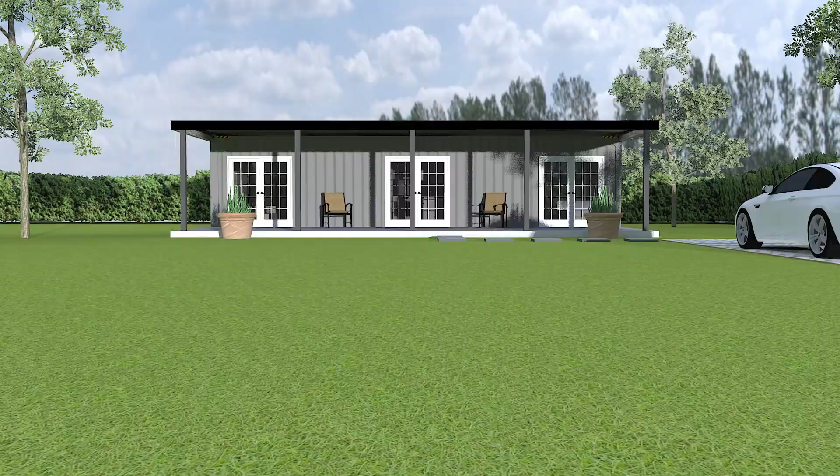The full tour of this container home will continue at the end of this video, but first, let's see how this model was made.

Okay guys, so today's 3D model is for a client who hired me. He had a shipping container home idea, very simple one, single container with a little patio deck out front. There it is right there. Let's go ahead and dive in and see how I brought this 3D model to life for my client.

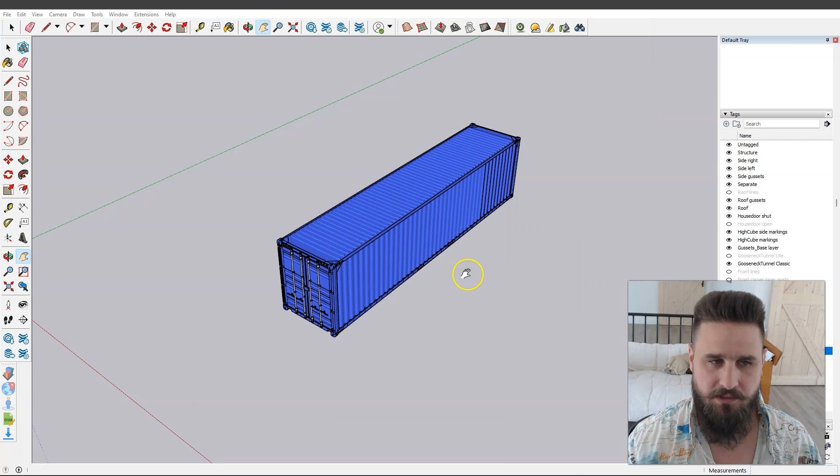The client provided me a few YouTube video examples of the shipping container. Essentially, it's a single 40-foot high cube container. First things first, let's go ahead and make the roof invisible.

Probably the most important detail that he told me was he wants a small room on either end of the 40-foot container. So let's go ahead and put some walls in here to represent sort of this small room. You don't want to make a room too small.

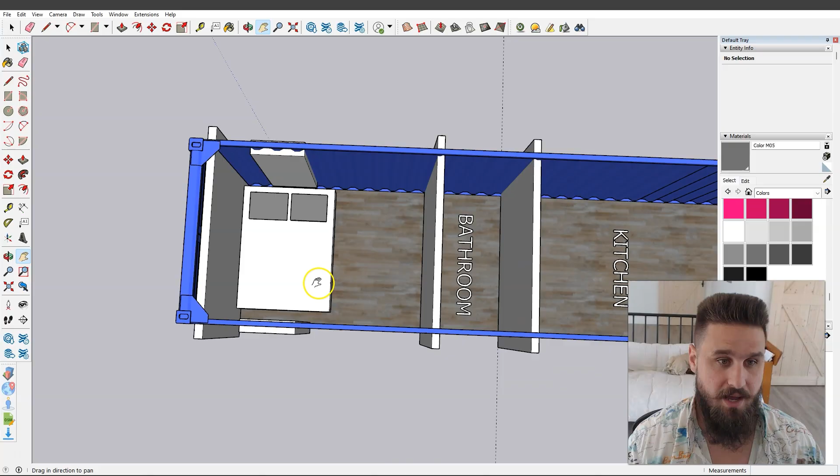So I think that for now, this is going to suffice. I'm going to send this over to the client, get his feedback, and then we will go from there.

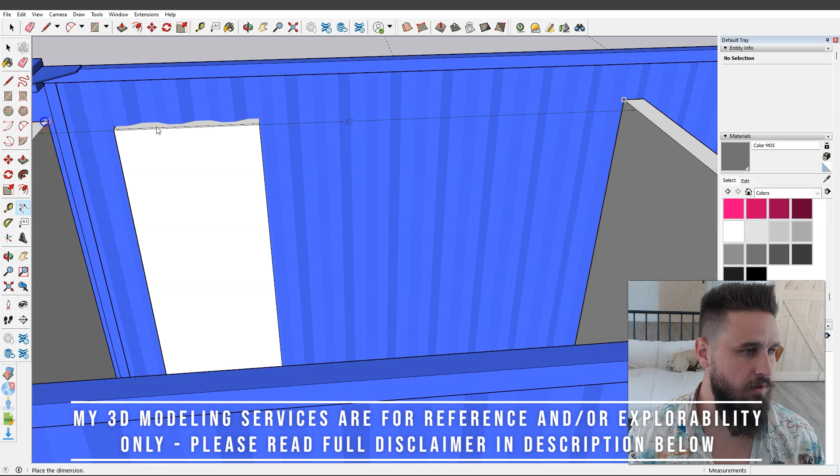Oh, I forgot to do one last thing. I'm going to add some sort of dimensional marks showing the dimensions of the rooms. It's going to be very important for the client so that he can get a sense of the current dimensions and what we're working with.

And we're back. I was able to get feedback from the client, and he's specified some of the details. So here is the drawing that he sent me. Again, basic, but this is actually, you'd be surprised how helpful these are. Hand drawn on a napkin if you want, it's perfectly fine.

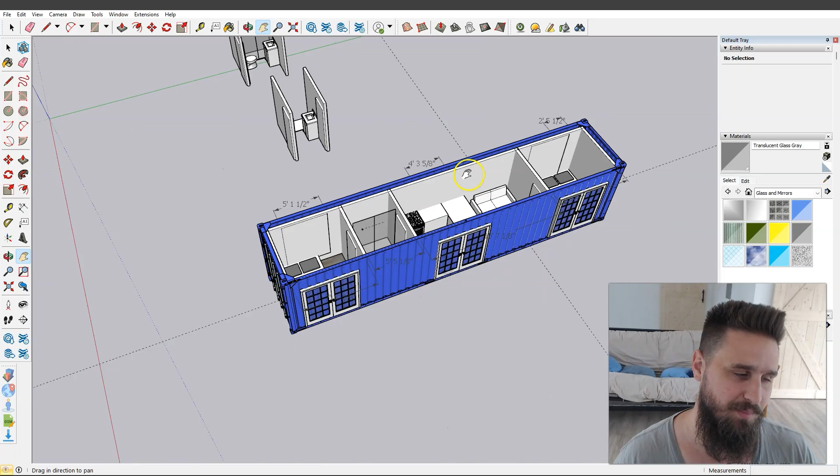Alright, we are back, and the client has taken a look at the model and he is quite confident in the current floor plan setup, which means it is now time to start framing.

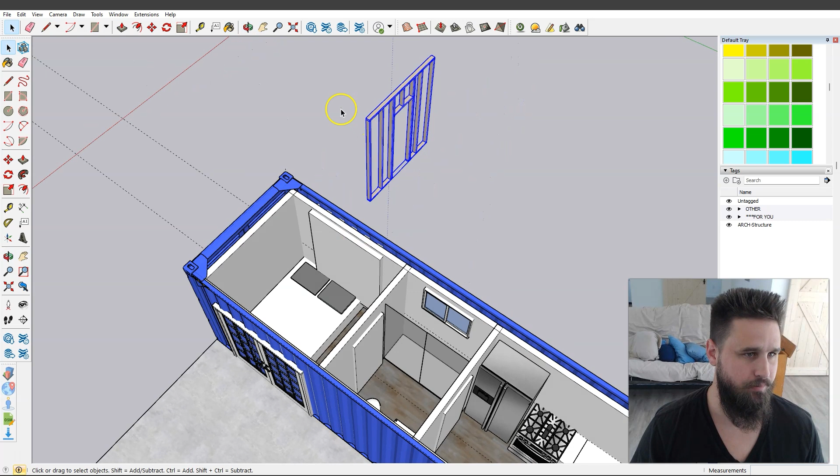So I have this template of some standard wall framing that I've used on other models. We're going to start over here on the end of the container. Let's hide that. I'm going to go ahead and bring this over.

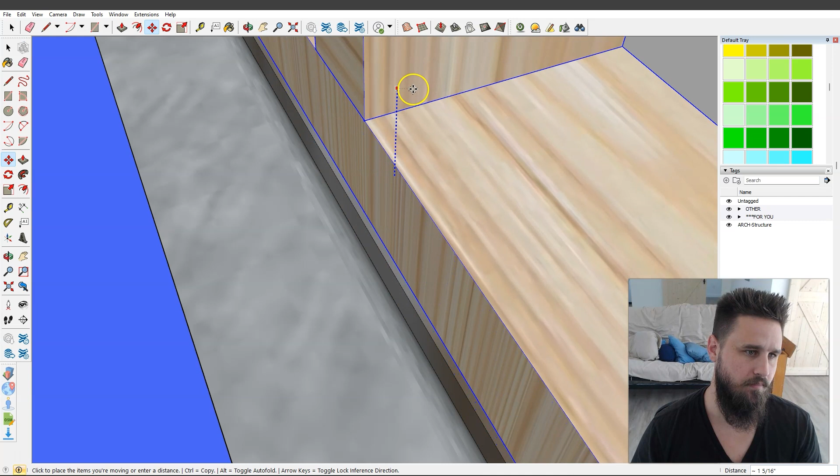Let's go ahead and make sure that we've got it. Yep, looks like it's already on the edge there, but it looks like we need to raise it up. Now obviously there's not going to be a door here, so let's go ahead and delete.

On that front, now let me go ahead and transplant this that I already had and see how well it's going to fit right here in the middle.

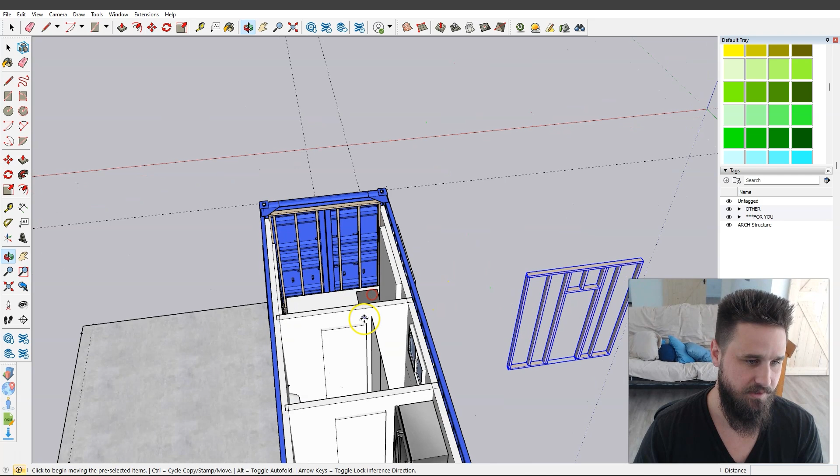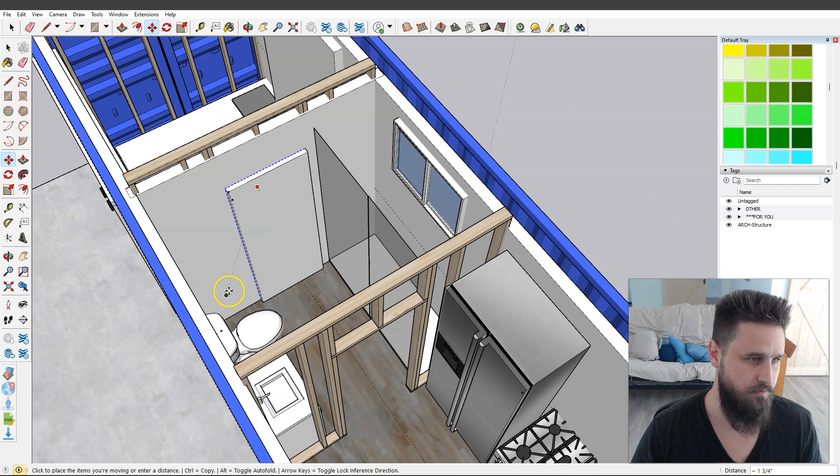Alright, now let's, wrong direction. Right, let's go ahead and hide this wall. This sucker right there, and then move this sucker over here.

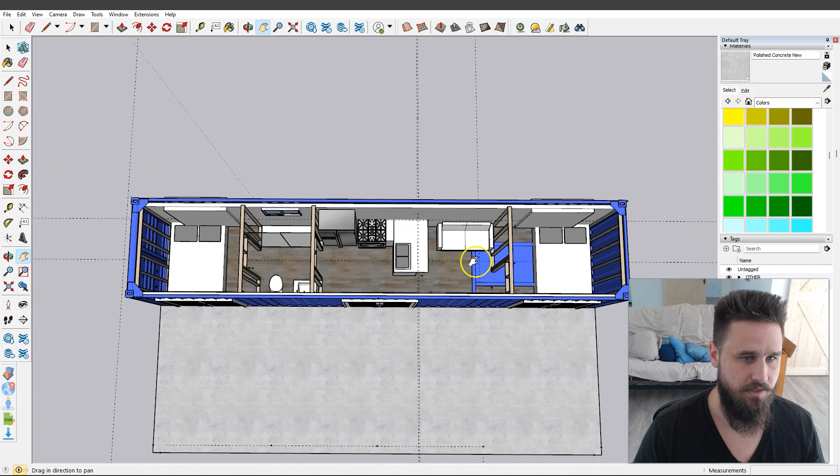So we've got all the walls that run perpendicular to the 40-foot length of the container. Let's go ahead and start framing out these long 40-foot lengths of wall, which do include numerous windows on this back, and then on the front, of course, it includes the French doors.

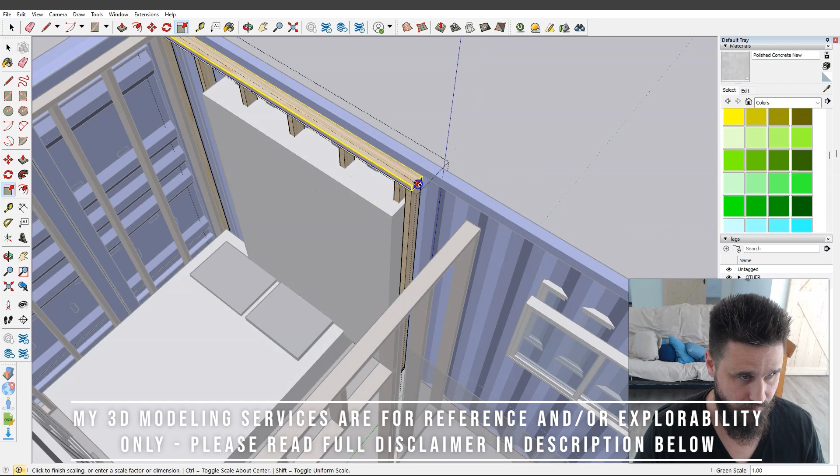Now let's hide this back wall. I have to frame around this window shape here. I know that this wall is basically going to be full length, so let's drag that all the way back there. Let's grab that bottom plate, give that a bunch of length as well.

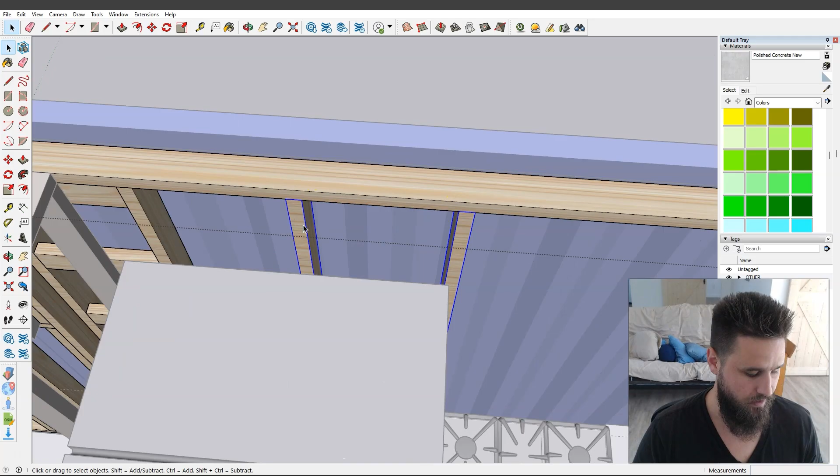That's looking perfect. Very good. Now that took some time. That definitely took some time.

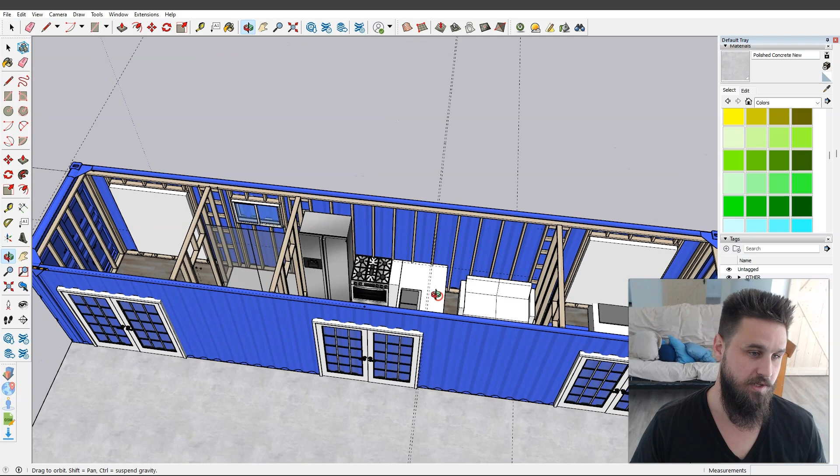But you can see now we have to go ahead and do the other wall, the front wall, which is pretty straightforward. It's basically just the only real unusual framing is going to be the French doors, and there's 3 of them.

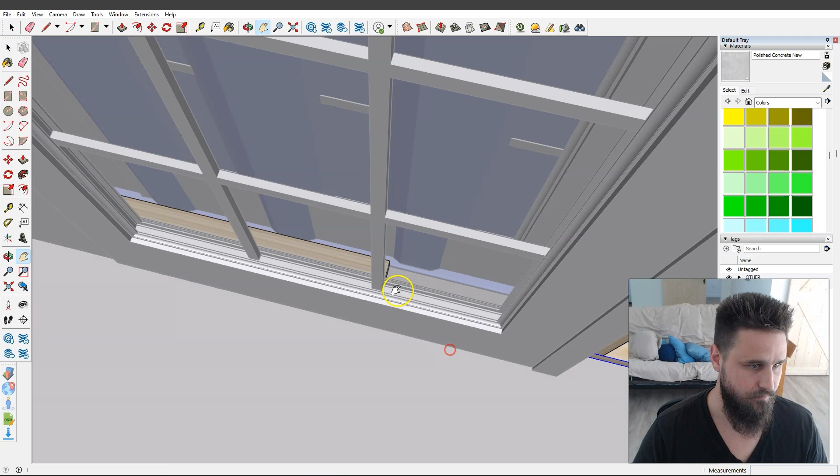So, looking good, and yeah, we're good now. I think that is basically it for the wall framing.

Yeah, okay, and we are back. I've received a little bit of feedback from the client, and let's go ahead and do a few things. First, he wants me to add an additional window right here in this living room, which I totally agree with.

Now I'm going to add a little bit of cabinetry to the kitchen. That was one thing he wanted.

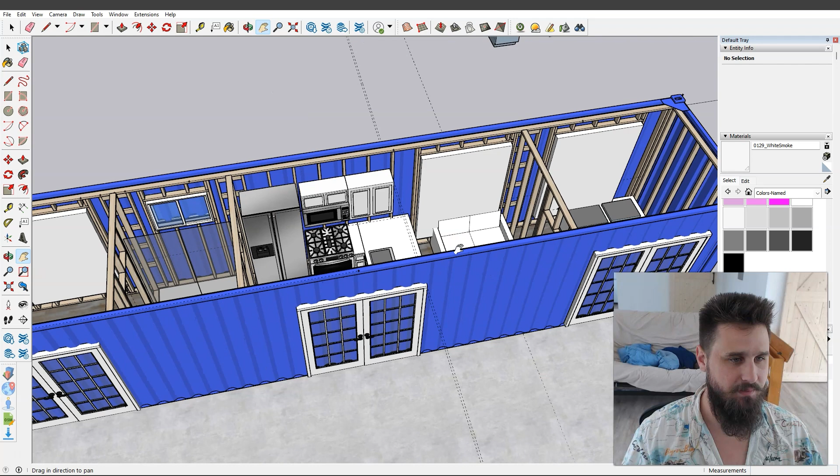That's pretty much it. Now it's time to actually finally, and I got approval from the client. He says we are good to go on finally cutting out the window and doors on the shipping container so you can finally actually see in and out.

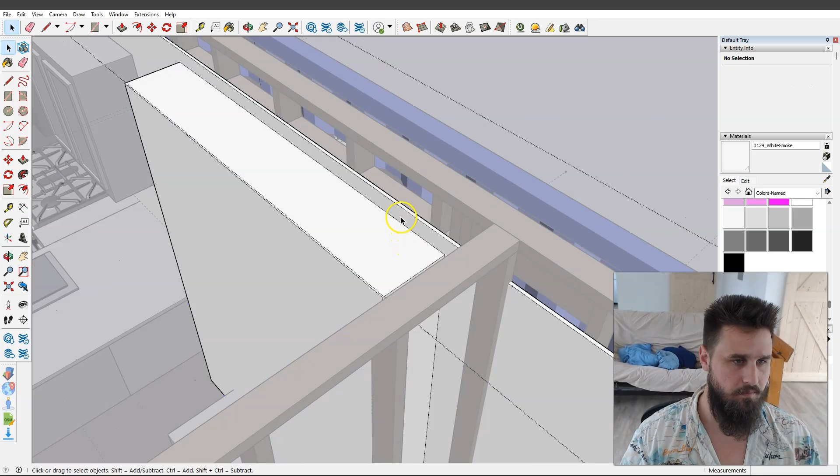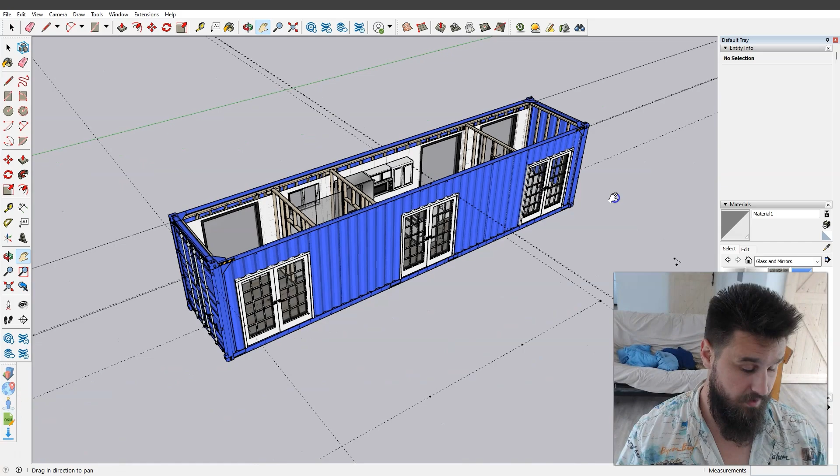Alright, so we have our French doors, really good location on the corrugation, filling in nicely on the interior. We've got all our windows removed. That's actually it for now.